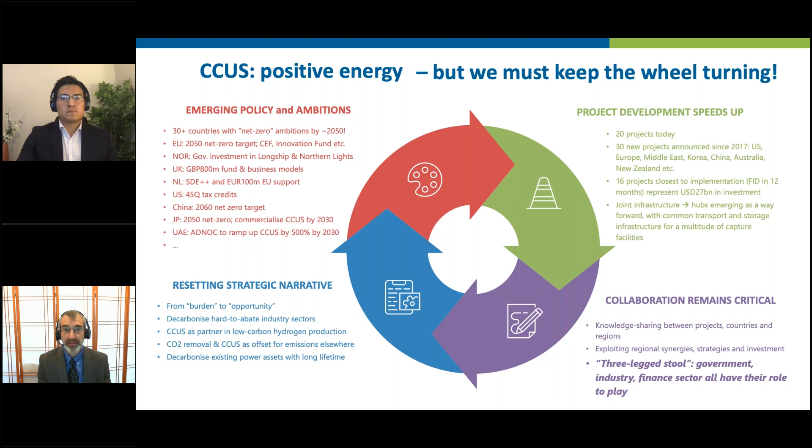So on my last slide, this brings us to our topic of conversation today: the fact that CCUS is a critical solution across many sectors in industry, specifically in heavy industry, where a large part of the CO2 emissions are actually process emissions from those industrial processes themselves.

Just to put a framing order of magnitude on it, in 2019 those process emissions were 2.5 gigatons globally, which is equivalent to India's total annual emissions. So this is quite a large slice, and becomes a larger percentage as we decarbonize other aspects of society.

And 63% of those were from the cement sector. So hopefully with this brief framing, you can see that CCUS is a central solution and is of great concern, specifically in the cement sector.

With this brief introduction and framing of the CEM and our CCUS efforts broadly, I'll now ask Claude to tell us about the Global Cement and Concrete Association's efforts and ambitions regarding carbon capture and storage. Claude, over to you.

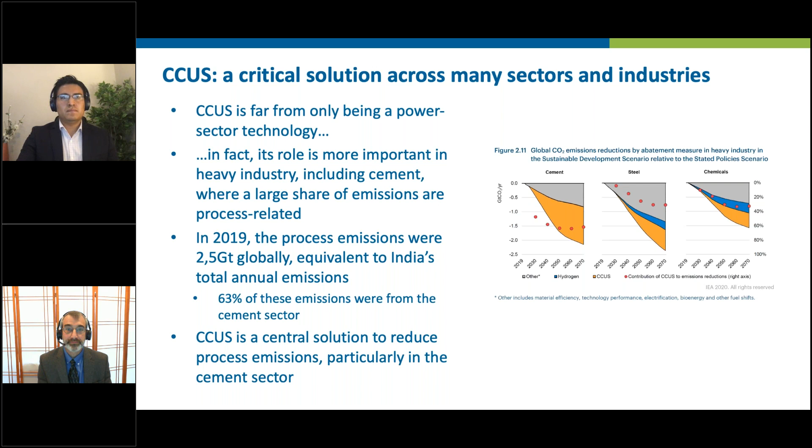Thank you, Jared. Hi, everyone. So yes, the GCCA is the Global Cement and Concrete Association. We are a CEO-led organization, and we have around 40 members, and we represent a little bit more than 40% of the world capacity, trying to increase that number.

We are a rather young organization. We have been established in 2018. And I would really like to frame this webinar into our climate ambition.

So last September, the GCCA released a climate ambition whereby our members commit to continue to drive down the CO2 footprint of their operations and their products, and aspire to deliver a society with carbon neutral concrete by 2050. And to do this, we will work across the built environment value chain to deliver this aspiration, in a circular economy and whole life context.

If we can go on to the next slide, Kevin, please. Now, why is this so important? And actually, also probably why is this webinar so important?

Concrete has an essential role to play in the modern world. We know that we have an increasing population, increased urbanization, still the need for housing, but also concrete has an essential role to play in delivering clean energy by building hydropower, windmills, schools, hospitals, housing, safe dwellings. But last but not least, we also need to build more resilient cities to protect our cities and the people from a changing natural environment and changing climate.

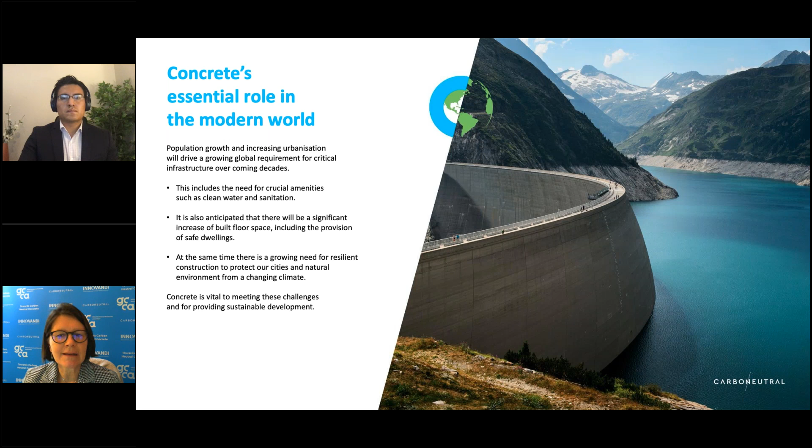And we have a certain number of levers to achieve carbon neutral concrete. And also, as I said, we want to do this from a whole value chain perspective. So we have the levers that we know.

It's to increase fuel substitution, to have more energy efficient processes, to reduce the clinker or the binder content in cement and in concrete, to reprocess, to be more circular, also over the whole value chain, to recycle aggregates, turn construction and demolition waste into recycled aggregates.

Also quantify the level of CO2 uptake by the built environment, but essential will also be to reduce process emission through new technologies. And this is actually what we call carbon capture, use and storage. And that's, we will hear more about 3 of our members actually today.

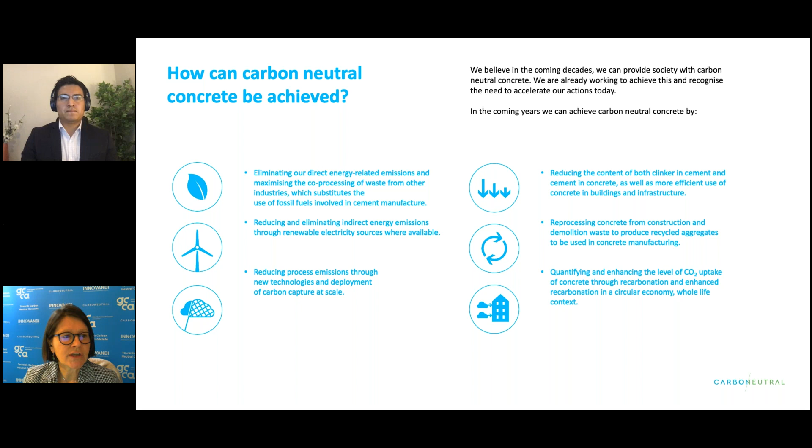So if we move on to the next slide, to finish my introduction, this climate ambition is also accompanied by a set of policy asks. So what do we need from policymakers?

I would really like to draw your attention here on, amongst this, first, the need to support research and development of breakthrough technologies, as well the acceleration and proven efficient low carbon technologies with a specific focus on CCUS, and then also promote cooperation between governments to develop the CO2 transport and storage infrastructure that is needed.

And last but not least, also we need to drive the demand for sustainable building materials. So those are the policy asks that we have, and I think that's my last slide, Kevin, and we can go immediately into our speakers that will share more on the field presentations. Thank you very much for being with us today.

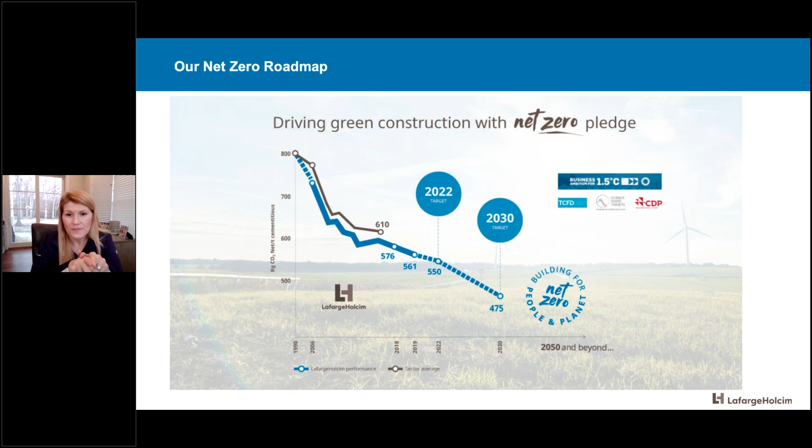And the work we've done is important. As it's already been mentioned, concrete is a very important product to society. It's not going away. It is the second most consumed product in the world next to water, and demand will continue to grow. And even in its existing state, it remains the most durable product with the most longevity, it has resiliency, and all with that combined, even with its impact, it still has the lowest embodied energy and lowest carbon intensity versus other building materials. So we really have to decouple the material impact of concrete from the volume demand of concrete and understand that despite its impact, it still is the best building material.

But that said, we realize that every ton emitted still counts, and that we must work tirelessly with both short-term goals and long-term reduction targets.

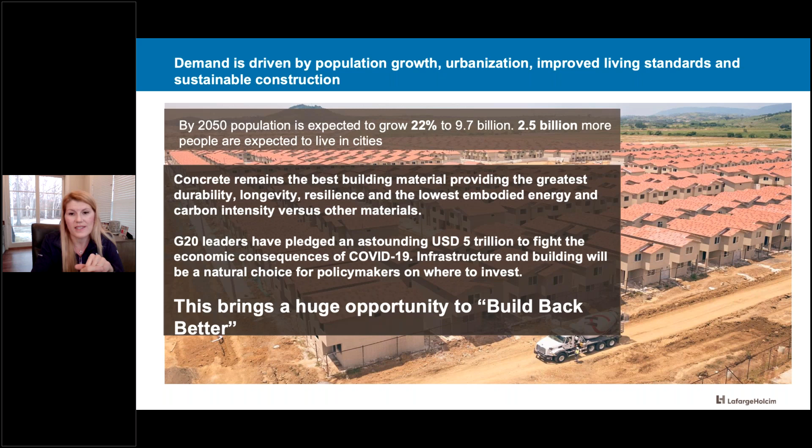So there's work we can even do in the short term, and many of the levers that we have were already mentioned, but we have barriers to some of these levers. So clinker factor reduction is something that we work on, but acceptance of these lower carbon products that this creates is an issue, especially here in the United States. Our clinker factor is currently 90%, and we're working to drive that down.

Alternative fuels, we also have barriers there, getting local regulators to approve that, but also use of unconstrained natural gas is an issue for us. We're working to increase our use of renewable energy. Currently in the US here, I have 6 different projects going to increase the use of solar as well as the use of wind to power our plants.

We also continue to try to improve the efficiency of our plants. So we've invested over the last 10 years here in the US alone, almost $1 billion just to upgrade our facilities. But we have work we can do to continue to use the data that we collect in our facilities to increase their efficiency and use AI to automate things.

And then I mentioned before, the use of green products, really important that we get acceptance of green products and get our regulators and those who actually procure the most green products to get them utilized. And then finally, carbon capture. We understand that carbon capture will play a fundamental role in getting us to net zero.

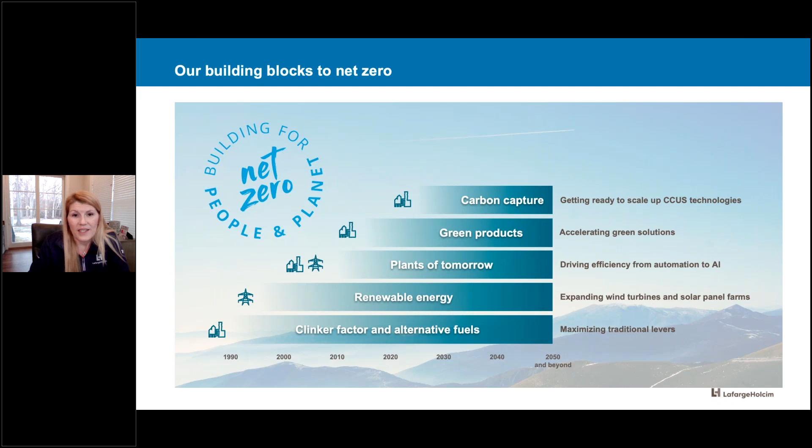So within CCUS, we are working in all 3 fields: capturing, utilization, and storage. Across the world, we have 20 different projects that are in all different stages. This large range of CCUS projects gives us the flexibility in applying these technologies, and hopefully in the future we'll have both the best technology and the cost that we can replicate across the entire world.

We know that there's no single solution. It's going to be difficult to scale in some places. Different local partners will have different local regulatory frameworks, and we'll also have different geological conditions. So we need to explore all different possibilities. But also, as we do this, the one other key question is, what do we do with the CO2 afterward?

So we look at utilization. We need to be able to take this pollutant and use it as a raw material for various products. Building materials is one. We're definitely exploring that, looking at mineralization, creating aggregates and such. Also utilizing CO2 to cure concrete. We have a product called Solidia that allows us to use almost 1/3 a ton of CO2 to cure a ton of concrete. So high utilization of CO2 there.

But we're also looking at the use of it as synthetic fuels, renewable plastics, uses in greenhouses for growing crops. So we're looking beyond just cement and the building industry and other materials to find solutions for the use of CO2. And on the other hand, we continue to investigate CO2 sequestration. We believe this will also be an important part of the decarbonization journey.

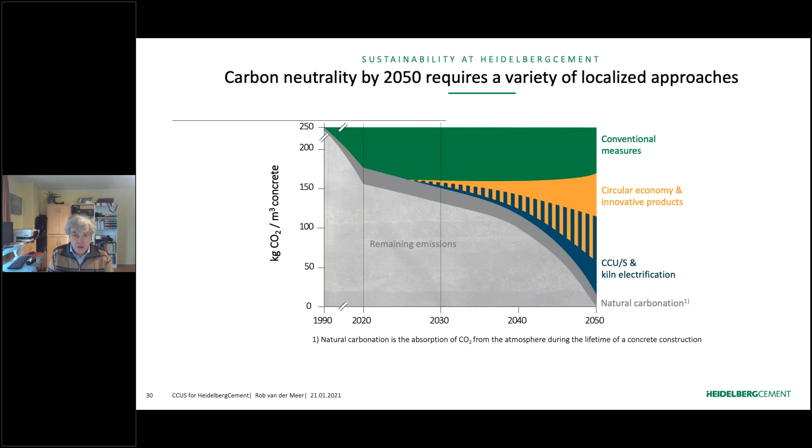So let's go to what are we doing - the next slide. I want to brief you on the three challenges that we see on this road to carbon neutrality.

The first is to look at energy efficient capture of CO2 from the kilns in our production processes. We have more types of technologies available, but I listed three here. The first is the post-combustion process, in which amines absorb CO2, and that CO2 can be desorbed, stripped in a separate installation, and used for carbon capture and storage, but also for use in other installations. We have several projects in Europe running - four research projects mentioned here - and I want to highlight two special projects. The first is the pre-industrial project in Edmonton, Canada. That's one of my last slides, so I will come back on that.

The second is, in fact, the first industrial commercial scale project that is going to happen in Brevik. At the end of last year, we got final approval from the Parliament in Norway for this project, where we will capture 400,000 tons of CO2 a year and store it in the North Sea underground. That is a big step for the cement industry worldwide, and of course also for us. We have been working on this project since 2005, and it will be in operation in 2024 - nearly 20 years of development and research.

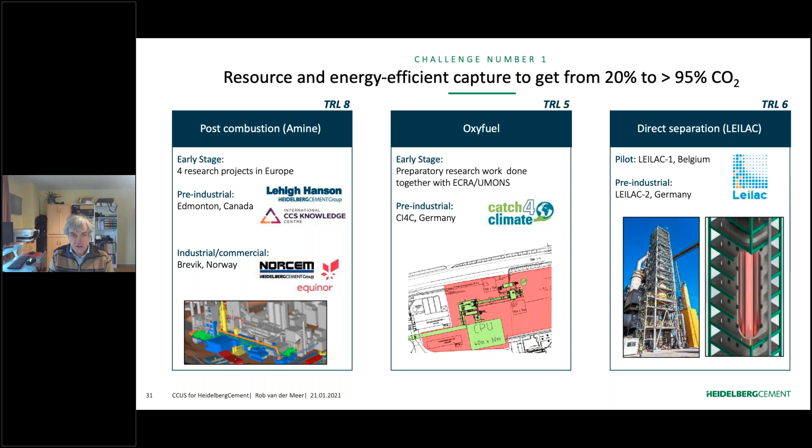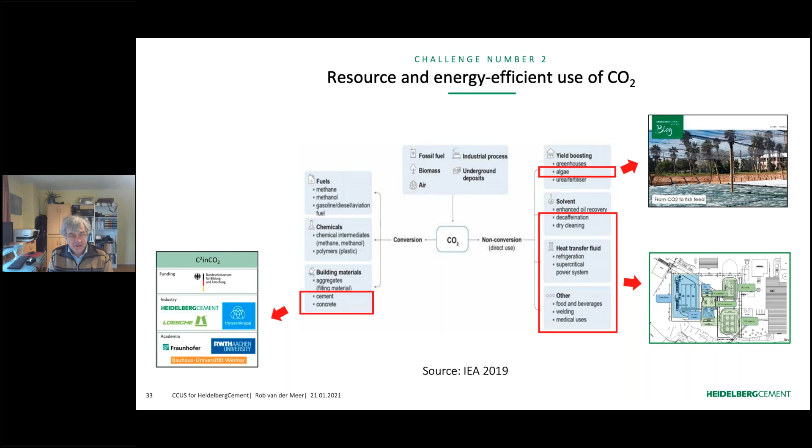The next slide is on the second challenge I wanted to highlight: how can we use the CO2. You see here the different purposes and possibilities for using CO2.

The first one is Catch4Climate in southern Germany, where we will look at how we can use that CO2 for producing fuels, like also the projects of LafargeHolcim. The second is looking at the possibility to use CO2 for recarbonation, but also for mineralization of aggregates, a complete new topic for industry, but very important for the concrete industry. Number three is about the use of algae, so CO2 to produce algae. We have a huge project in Morocco, in Northern Africa. And the last one is a combination of these technologies in one bigger product where we can use the CO2, for instance, for food and beverage production.

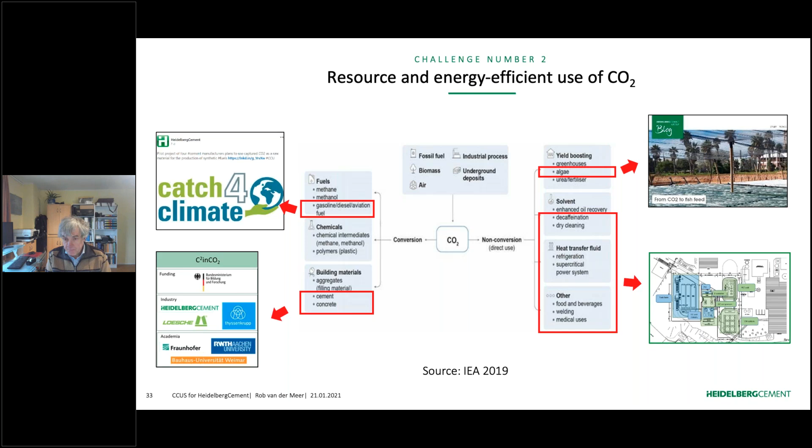I would like to go to the third challenge, carbon capture and storage. Offshore storage is very well known, especially in Norway, the Norwegian project I mentioned already, but also in the UK and the Netherlands, work is being done on offshore storage. On the other hand, we think that in Eastern and Southern Europe, offshore storage in the sea is much more challenging because there is not much storage capacity. We see possibilities in onshore storage, on land, and we are developing two projects in Eastern Europe at the moment. We were just not ready for application in the first round of the EU ETS Innovation Fund, but that is possible for the second round.

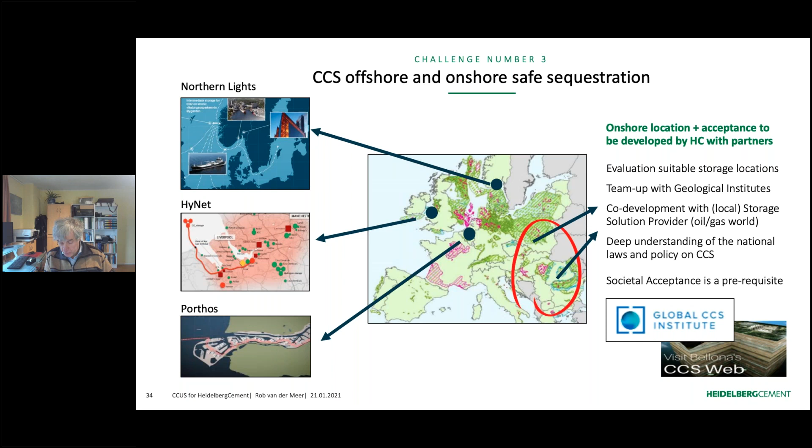The last thing I wanted to show and talk about is what are the fundamentals for decarbonization of the industry. The first is the technical requirements, and I've highlighted in this presentation that there are a lot of developments, and that these developments are very positive. The second is the infrastructure that is needed for this.

We need a CO2 infrastructure and a hydrogen infrastructure and renewable electricity. We need recycled concrete to be used in concrete in the future. That is a challenging thing. The Canada project is very interesting for us because there is already infrastructure in the neighborhood, but in many places there is nothing—especially in Africa and Asia, that will be a huge challenge, apart from the already huge things to be done in the US, Canada, and Europe.

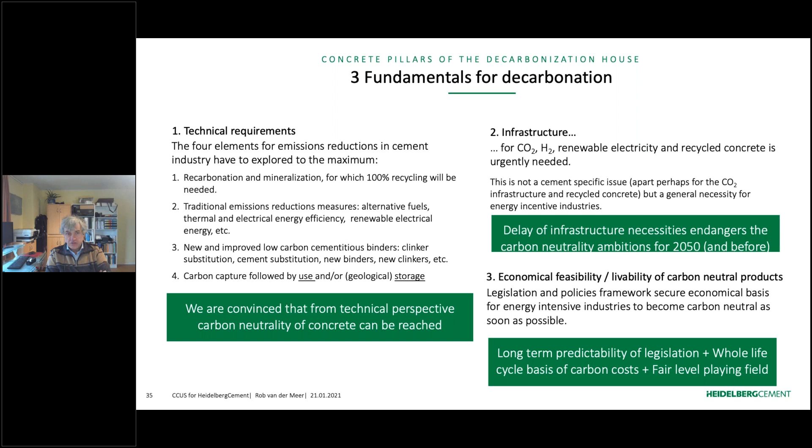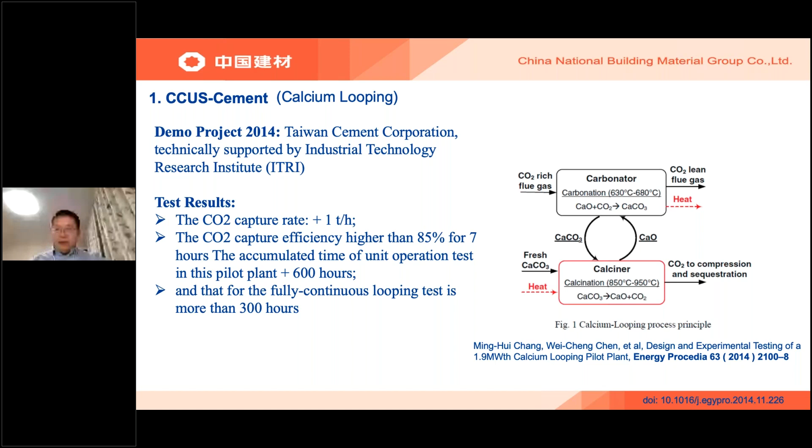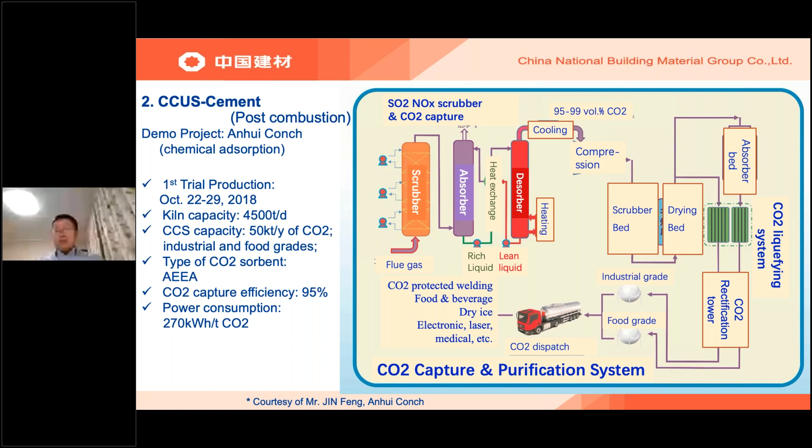The third solution is CCUS cement with mineralization sequestration process, a demonstration project designed by Sinoma. The concept is to use CO2 from the flue gas to react with carbide sludge, mainly containing calcium hydroxide, to produce high value-added precipitated calcium carbonate. Using the same solution, precipitated barium carbonate can also be produced in industrial projects in China.

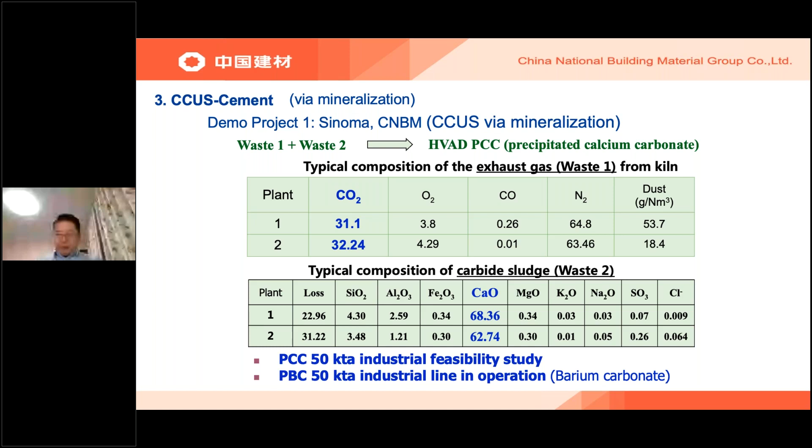Another example of CCUS cement via mineralization sequestration is a demonstration project with technical support from Zhejiang University. A 72-hour trial was made to produce pavers using CO2 curing instead of autoclave curing, using steel slag, bottom ash, etc. as the main raw materials to produce about 1,800 tons of concrete pavers. The efficiency of CO2 sequestration by the pavers is more than 80%.

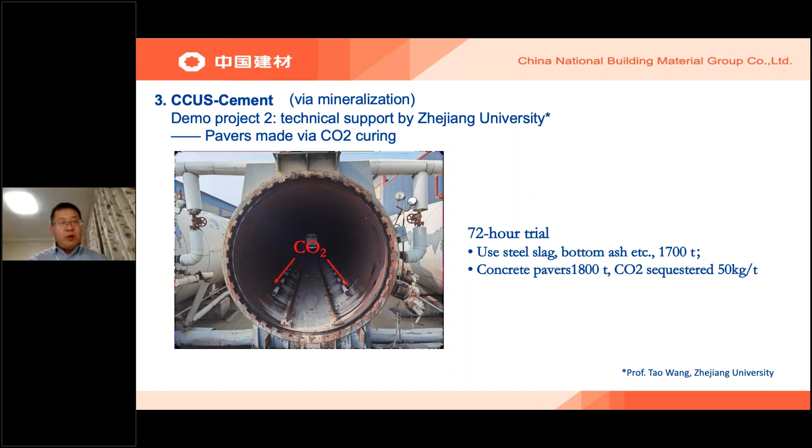The fourth solution is CCUS cement via oxy-fuel and CO2 enrichment process, developed by Sinoma in China. By using this process, the CO2 concentration can be increased from the normal 20% up to 75%. With this enrichment of CO2, we expect the CAPEX and OPEX costs for CCUS can be reduced by 10% and 30% respectively.

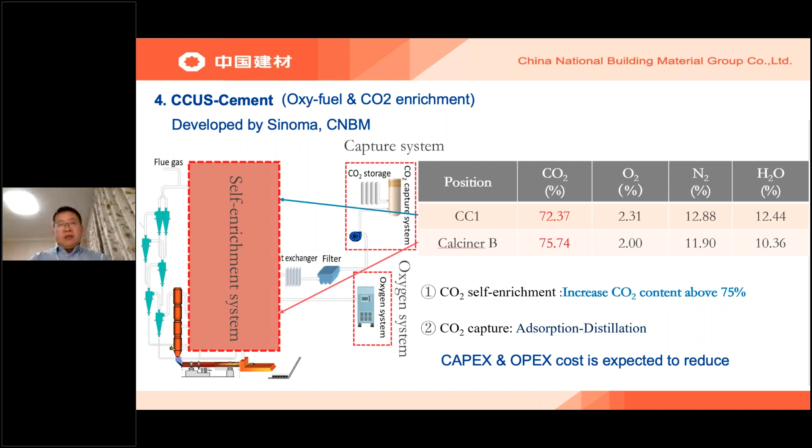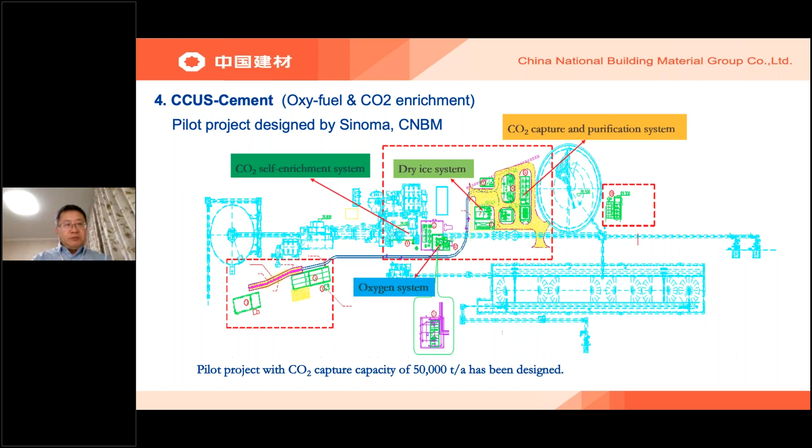The flow chart indicates the pilot project designed by Sinoma, with CO2 capture capacity of 50,000 tons per year. Now comes the second part: policy and future perspective. So far, by the end of 2019, there were demonstration CCS projects in China: 9 for CCS and 12 for geosequestration and utilization.

So far, 2 million tons of CO2 have been sequestered by these projects, mostly in the coal and power sectors. The pilot ETS process in the cement sector has been implemented since 2011, mostly in 7 provinces and municipalities. At present, the following challenges on CCUS cement have been addressed: further R&D to reduce cost, policy regulation standardization enhancement, financing and business model, cross-sector and international collaboration.

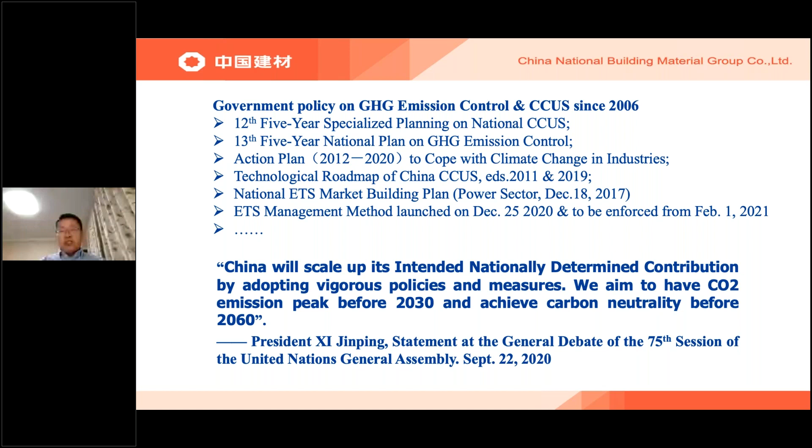Thanks to the government's continued support to the control of GHG emission and CCUS, a number of policies and regulations have been enforced since 2006. Some are listed here, but the most important is the commitment made by our President Xi Jinping last September at the 75th session of the United Nations General Assembly: we aim to have CO2 emission peak before 2030 and achieve carbon neutrality before 2060. Now the whole country is taking action.

I look forward to working with you for a community with a shared future for mankind. Thank you very much.